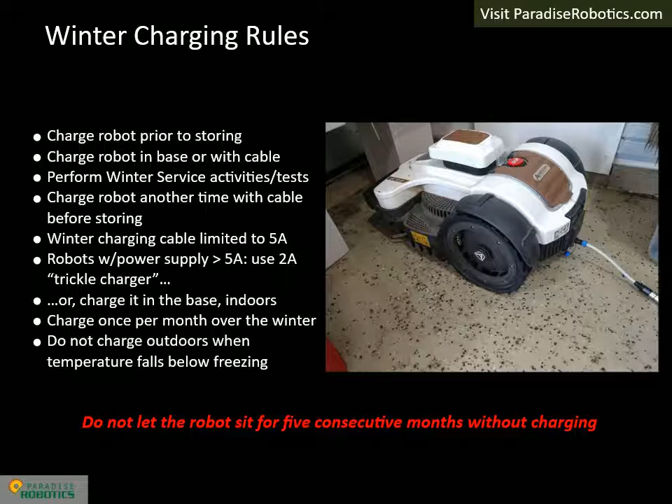Exposed metal contacts always collect invisible oxidation over time. The oxidation must be cleaned each year to prevent charging and rain sensing issues. When the oxidation is allowed to accumulate, a faulty conclusion that the battery has failed can be the result. Always inquire about the age of the battery, because charging issues are typically due to this oxidation problem or something else, such as a bad connection in the base, whenever the battery is less than 8 years old.

Preventing the unnecessary sale of batteries has 2 advantages. First, it increases customer satisfaction and loyalty, which leads to repeat business. Second, it is better for the environment.

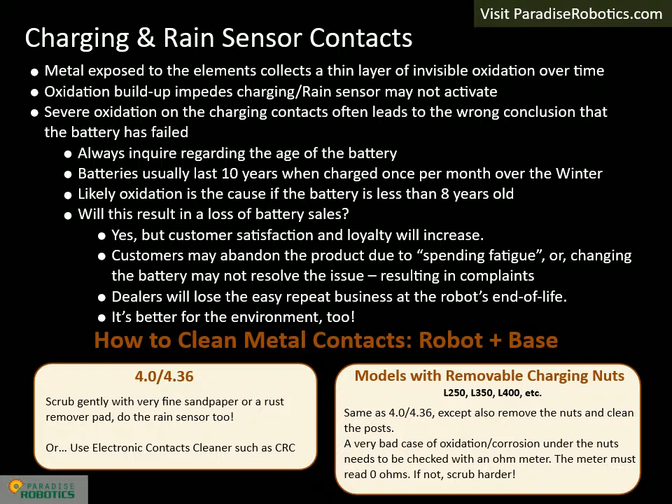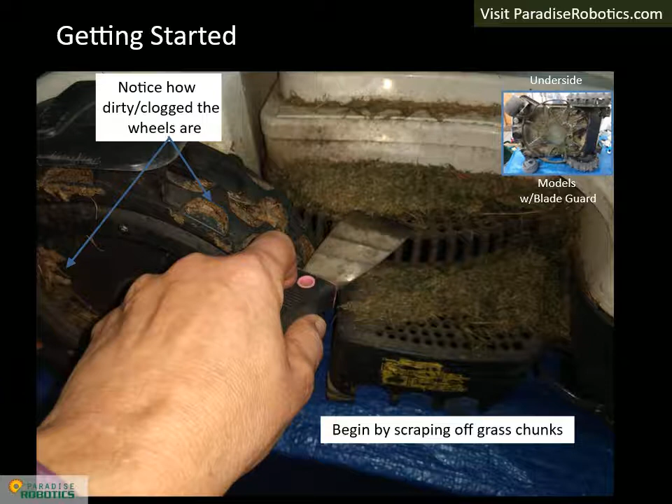It is typical for a robot to have a significant amount of grass that clogs the top or underside, depending on the model. A putty knife is the best tool for scraping and removing much of the grass. A paint stick can be used to reach grass under the blade guard for models that come with one. A small Shop Vac type of vacuum cleaner is an essential tool for performing winter service. By vacuuming as you scrape grass, the overall mess can be reduced significantly.

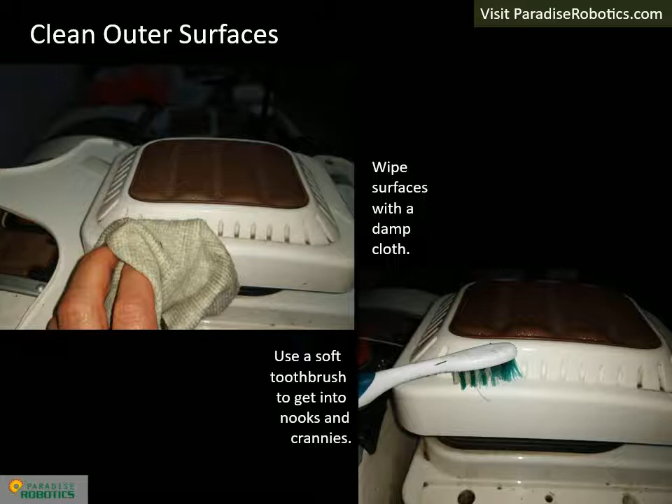Clean outer surfaces with a damp but not dripping cloth. Use a soft toothbrush to get into tight spaces. If you decide to use a cleaning agent, choose something mild such as well-diluted Dawn dish soap.

Use a tool such as a flathead screwdriver to lift the front cover off. It is held on with Velcro. Once the cover is removed, place it in water to soak. Do not soak it overnight as it may cause the labels to come off. Vacuum the top first, then wipe it with a damp cloth.

There are 2 levels of cleaning in winter service: functional and detailing. A functional cleaning can be vacuuming and using a dry brush to brush out the remaining debris. Detailing can be wiping and removing all grass stains. Landscapers that maintain an entire fleet of robots may choose to only do a functional cleaning to save time. Dealers may choose to offer 2 levels of winter service, such as basic and full detailing. Basic winter service would be functional and is at the level the manufacturer requires to maintain the warranty, while full detailing is as close to perfection as the dealer desires.

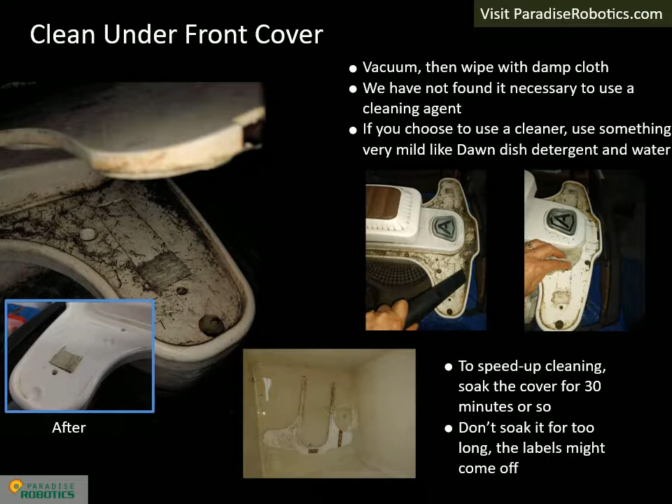The front undercover has about 10 recessed screws. If dirt and debris are allowed to accumulate, it can create difficulties to remove the undercover during a future repair. Remove or loosen debris with a small needle nose plier or flathead screwdriver. Vacuum and then clean stubborn dirt with a wet Q-tip. The goal is to ensure the screw heads are not clogged with dirt and remain functional.

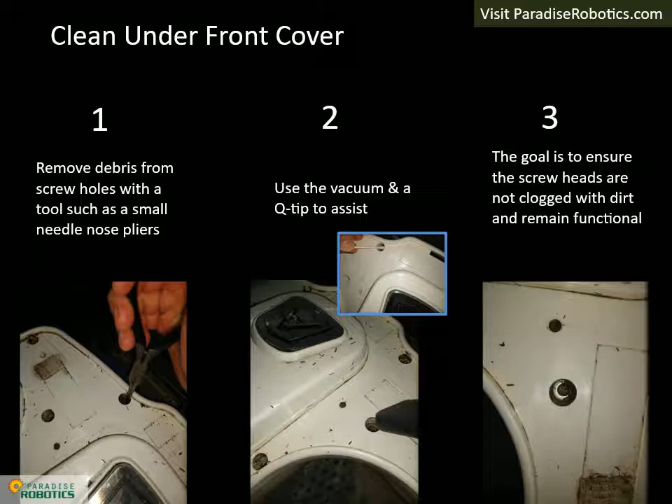Depending on the level of cleaning being performed, that is functional or detailing, the dirt around the edges can be cleaned with a wet toothbrush and then wiped, or it can be left as is. The undercover will be removed in a future step. After reassembly, plan to insert cotton balls in each hole to avoid the screw hole cleaning step during future winter service.

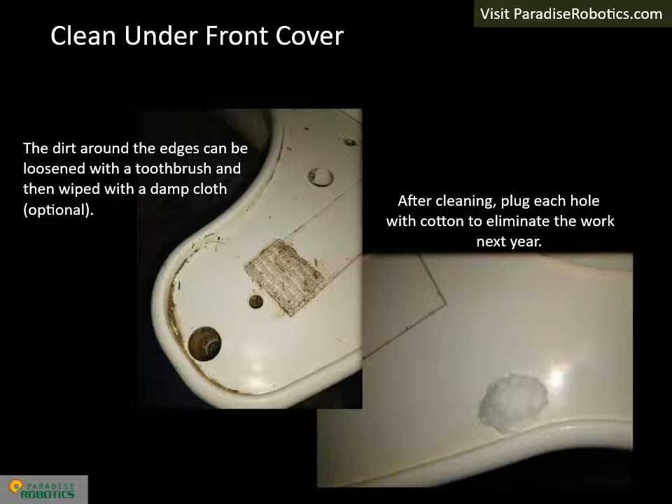Remove and soak the blade in water. We find that a nut driver is easier than using a Phillips head screwdriver to remove the blade.

After soaking, scrape the blade with a putty knife and sharpen it with a Dremel tool that has a sanding bit, or do it another way, using a technique similar to sharpening a kitchen knife.

A functional cleaning of the underside is to scrape off major debris with a putty knife. To fully detail the underside, the robot can be turned upside down and a damp but not dripping cloth can be laid on top of stubborn stains for about 30 minutes. Brush the softened grass with a small nylon scrub brush and wipe it off, repeating as needed until fully cleaned. Never ever use a power washer or hose to clean the underside.

There are electronics up above the wheels and there is a risk of water seeping into the blade motor. Water will cause electrical shorts that will make the electronics fail.

E6000 glue, which is widely available online and at major retailers, is an essential material for repairing unusual problems. Choose the version that dries clear. It is durable, flexible, long-lasting, and highly water-resistant. We have used it for sealing possible water leaks.

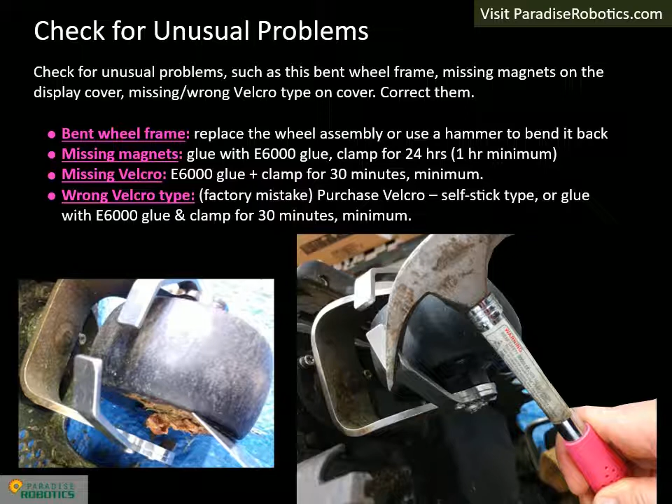Components that turn have a high risk of picking up debris. The debris winds itself around wheel axles and on rare occasions, the blade motor shaft. This debris must be removed. It creates friction that can reduce the runtime or worse, cause a failure if left in place year after year.

A small needle nose pliers is often helpful for grabbing onto debris. After cleaning the debris, ensure the tire turns 360 degrees. Then also verify that the wheel assembly turns cleanly 360 degrees on its vertical axis. Do not apply grease to any front wheel joints.

Certain models have a motorized height adjustment. These models have a rubber bellows that expands and contracts when the height is changed. It is important to clean the grass between each bellows fold. Also inspect the bellows for damage and replace it if necessary.

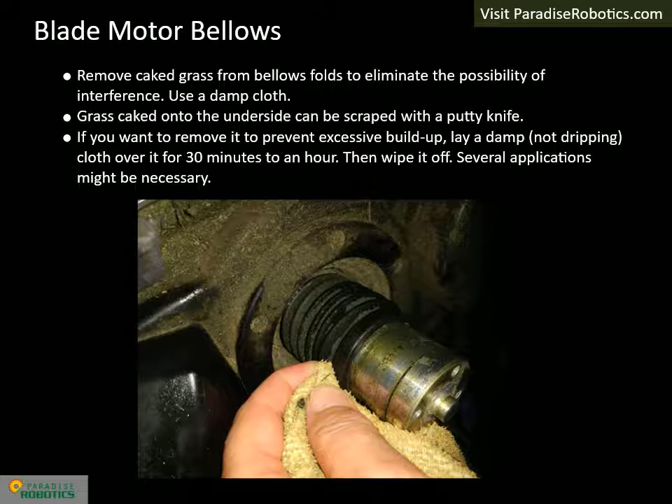Batteries and power modules for models that have the battery installed from the outside of the robot, such as 4.0 and 4.36, need to have their contacts inspected. This step is not necessary for models that have their batteries internally installed.

Use a T20 screwdriver of high quality and in good condition to avoid stripping the screw heads. A stripped head on these components is seriously detrimental to the ability to troubleshoot and repair certain power-related problems. Always provide a firm grip and turn slowly by hand. Never use a power tool due to the risk of stripping screws.

When reassembling these screws, do not apply thread locks since this could create difficulty in removing them in the future. Contact us if you encounter a stripped screw and are unable to remove it. We will provide some tips.

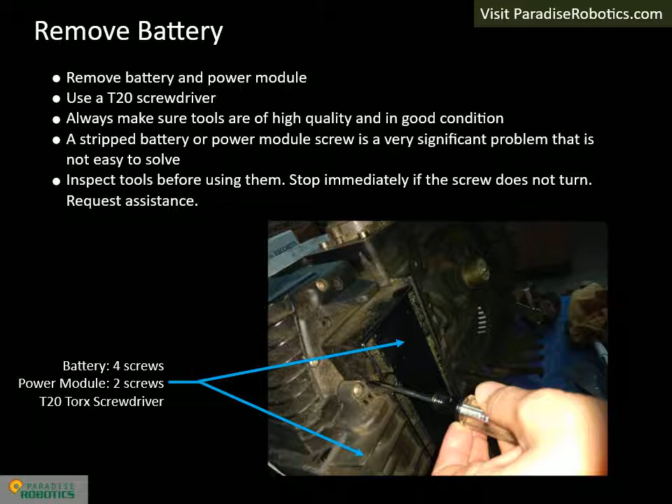Contacts on both sides must be checked. Look at the pins on the robot side and identify pins that have sunk down. If pins are not at the same heights, the connector has failed and it must be replaced.

Then check the contacts on the battery and power module sides. Melted pins on the battery side are an indication that the battery should be replaced. Melted pins on the power module may not require the module to be replaced if the damage is not too severe. This battery connector issue occurs most often in robots manufactured 2019 and before.

There was a factory quality issue that introduced a weak connection. Typically, premium or extra premium models are at higher risk, especially if an installation error is present that causes a false rapid return detection. A false rapid return causes the robot to circle, resulting in a very low battery.

During recharge, the very low battery draws the most current and creates the highest failure risk. All robots manufactured 2019 and earlier must be inspected for these issues. To reduce workload and to eliminate the risk of stripping screw heads, dealers may use their judgment regarding performing this inspection step on robots manufactured 2020 and later.

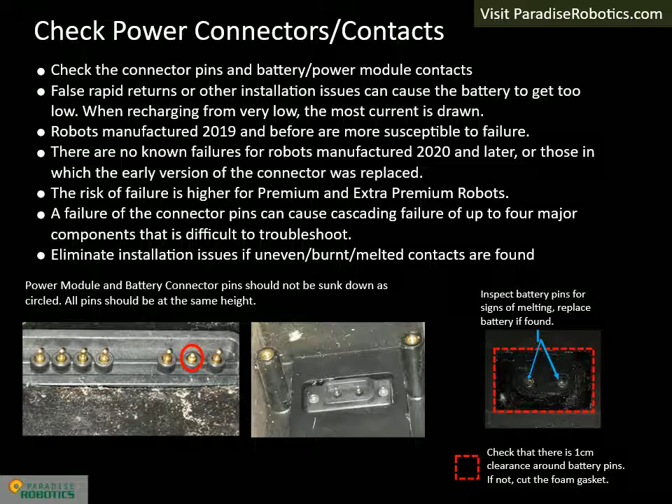Rear wheels with compacted debris must be completely disassembled for cleaning. Use a high-quality metric hex Allen wrench to remove the wheel bolt. It will take significant force to turn it due to the presence of thread lock. Provide even pressure and use the Allen wrench's long side to gain leverage.

If detailing, use the correct size Torx screwdriver to remove the fender if present. For a functional cleaning, it may not be necessary to remove the fender. Simply brush grass and debris off with a stiff nylon brush. Scrape any mud that might be visible after removing the wheel. Remove large debris from wheels and then soak the wheel parts and fender in water to accelerate cleaning.

Clean the old grease off of the hexagon and the wheel with a paper towel. Inspect the wheel motor shaft for wound hair or other debris. Remove it if found. Upon reassembly, a thin layer of Lucas oil red grease with anti-seize will be used to keep the wheel from seizing onto the hexagon, which is a major issue.

Find Lucas oil red grease at auto parts stores. If you can't find it, use an appropriate equivalent. Do not substitute a different grease type. To find an equivalent grease, use the material safety datasheet of Lucas oil red grease to identify the ingredients. The material safety datasheet of Lucas oil red grease is easily found with Google.

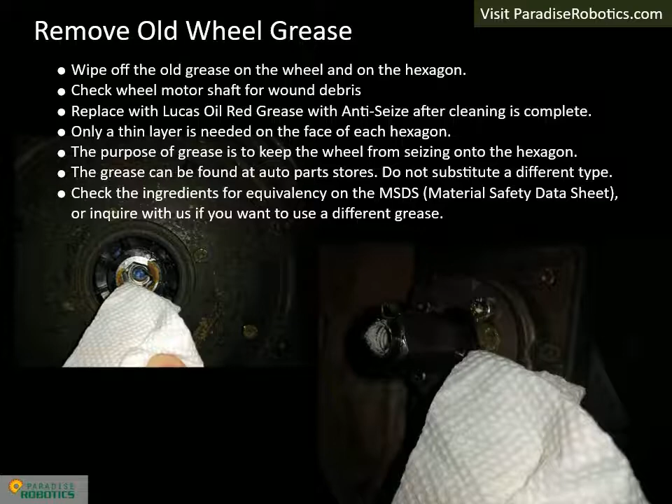A critical step is to verify the integrity of thread lock that is present on wheel motor mounting screws. The test is important because when there is no thread lock on the screws, they can vibrate out. The wheel will go out of balance and will cause catastrophic failures, such as a failure of the wheel motor, a broken chassis, or in worst case scenarios, a failure of the wheel motor driver on the motherboard.

The test is easily performed by attempting to gently turn the screw. If thread lock is worn out or not present, the screw will turn immediately with little or no resistance.

There are two additional important screws to check. One is a tiny screw that goes through the center of the hexagon and the motor shaft, and the other is a set screw on the side of the hexagon. Both of these screws are metric hex screws. There is no need to loosen the screws if thread lock is in good condition.

It is important to use the right type of thread lock. The thread lock recommended by the manufacturer is not easy to obtain in the US. We have substituted green Loctite or Permatex that is available at auto parts stores. It is important to avoid using too much thread lock or a thread lock that is too strong, such as blue. It is also important not to tighten the screws too much. I like to use the phrase girl tight, which means don't flex your muscles.

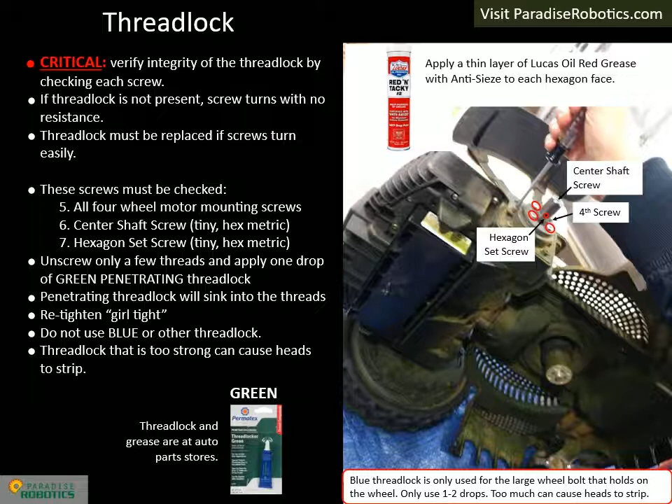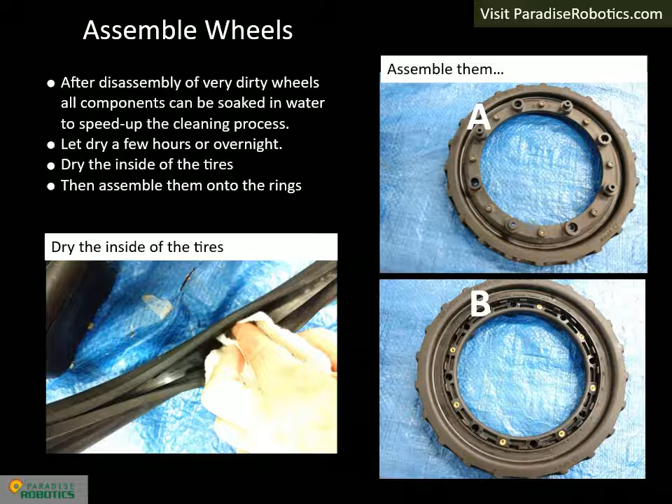Next, apply a thin layer of red grease onto each hexagon face as described previously. Finish cleaning the wheels and dry the inside of the rubber tires if they had been soaked. Then assemble the tires onto the rims. The rims with tires attached are labeled A and B.

Assemble the wheels as shown, following the 6 steps. First install the plate C. Stack C with A. Then stack B with A. Add the outer ring in the final step.

When inserting each screw, turn left first until you hear a click. Then turn the screw right. If you feel resistance, likely the screw has been cross-threaded. Stop immediately and try again. Make all screws girl tight. Repeat on each layer until all screws are installed. Do not use thread lock on the wheel screws.

Later, the wheel will be assembled to the wheel motor shaft. After installing the wheel bolt, remember to snap on the hubcap.

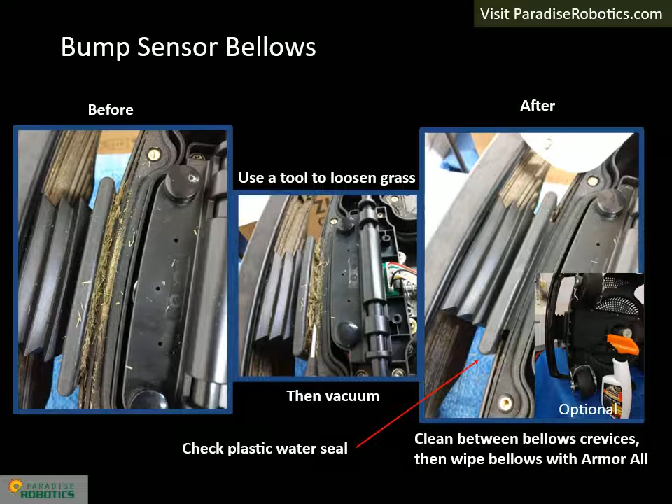Clean the bump sensor bellows at the front of the robot by loosening grass with a tool and vacuuming. Verify the plastic water seal is present and in good condition. Replace it if it is missing or broken. Wipe the bellows with water.

An optional step for longer lifetime of rubber components is to apply Armor All UV protectant. It can be used on clean tires and the outer covers too.

Remove each cover using the appropriate size Torx screwdriver. Remove the grass and dirt that has accumulated around the edges with a slightly damp cloth. Make sure the cloth is not dripping wet since water could get into the exposed electronics.

Look at the display film on the rear cover and ensure it is not coming off. Repair it if necessary. Do not let glue bleed onto the film when repairing. Use enough to seal the water out, but not so much as it oozes into the visible area. Use E6000 glue for the repair.

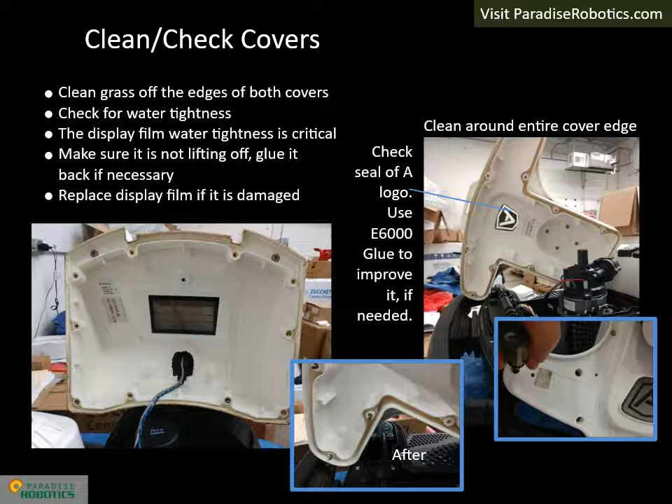Check the seal of the A logo. Robots manufactured 2019 and earlier may need to have their seals refreshed with E6000 glue. Apply a thin continuous layer. If the glue bleeds into the transparent areas of the A logo, it will be visible from the top.

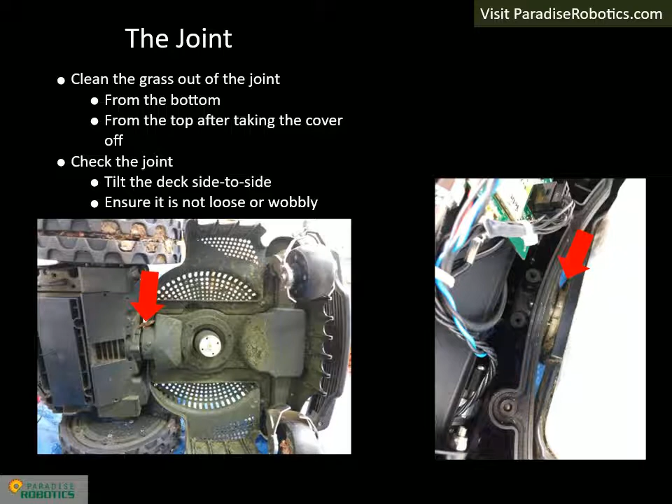It is easy to clean the joint when the top cover is off. Loosen the grass with a tool and vacuum. The bottom side of the joint can be cleaned in a similar manner while cleaning the underside. Then check the joint for mechanical integrity by tilting the deck.

If it feels loose, inspect for the cause of the issue and perform the repair. Clean the seals with a damp cloth. Glue loose seals with E6000 glue. Decaying grass creates humidity, which is bad for electronics. Vacuum both inner cavities and reassemble the covers.

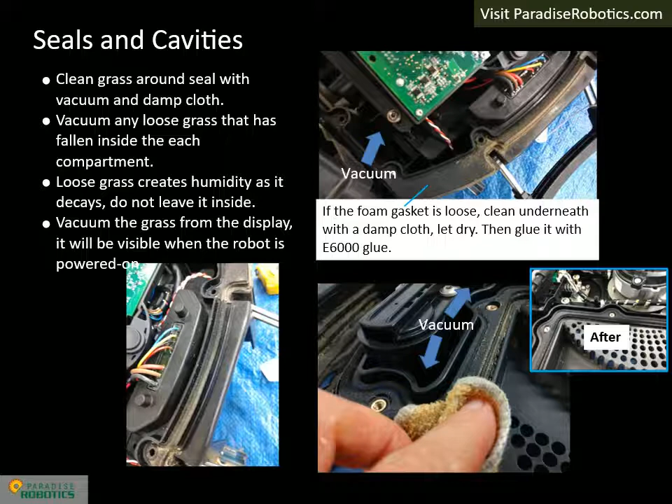Another important test is to look for play in the wheel motor. This can be done before or after cleaning. When doing it after cleaning, perform the test before installing the wheel bolt. Try to move the wheel from side to side. If it moves a significant amount, there may be a problem with the wheel motor shaft parts or the wheel motor itself. Investigate and solve the problem.

Use blue thread lock, only 1 or 2 drops. Apply it a few threads up from the bottom of the bolt. Install the battery. Do not use thread lock on battery screws.

Armor All Protectant can be applied to rubber components to extend their lifetimes. It brings back shine too. This step is not required, but is recommended.

L250i and 350i models have only a few differences compared to next line models. The winter service goals are the same: cleaning, mechanical checks, and electrical checks. The 250i and 350i hubcaps do not come out as easily as the next line models.

Use a scribe, push the tab in towards the A and simultaneously lift. The tabs are located at the 3 points of the A. The bump sensors for 250i and 350i are under the top cover.

The top cover is an integral part of the bumping system. The magnet that is sensed by the electronics is at the end of the metal magnet assembly. Remove the assembly and vacuum the cavity inside. Grass falls in there every season.

Upon reassembly, ensure the post goes through the hole at the center of the 4 springs and make sure the cover's horizontal slots fit correctly over the metal protrusions on the magnet assembly. The internal batteries of these models do not require any checks or maintenance.

The robot should be open to vacuum grass that may have gotten inside and to clean the seals of the upper and lower chassis. Bear in mind that the circuits are live since the battery is installed and connected. Be careful not to drop metal objects inside or let water drip.

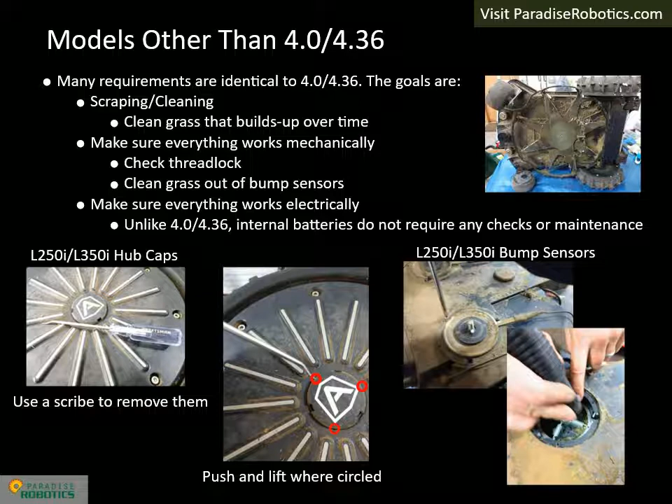The top side of the chassis usually has a lot of accumulated grass. Brush or vacuum it off. If detailing, wipe with a damp cloth.

As shown on the previous slide, remove the metal magnet assemblies. There are 2 magnet assemblies and 2 dummy assemblies on the 250i. The 350i has 3 magnet assemblies.

Vacuum the cavities. When reassembling, look for the horizontal keys on the magnet assemblies. These keys fit through the horizontal slots on the outer cover. If the cover is not reassembled correctly, there will be bump errors.

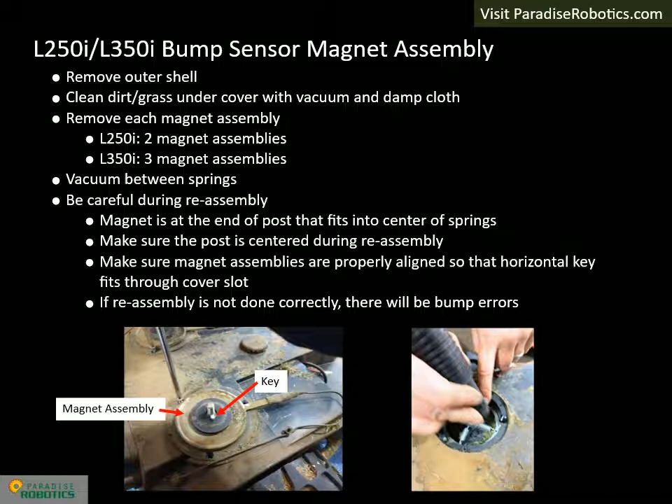After fully assembling the robot, it is time to perform the electronics checks. All robots manufactured 2017 and later use the TXC1 transmitter. That is, dealers can use the transmitter of any robot model for these tests.

Set up a loop that uses around 50 feet of wire. Typically, the tests are performed without having the robot move around in the loop. The wire can be tacked to a wall or may be laid on objects in your facility.

To completely check the robot, it will need to be placed a few feet inside the wire and a few feet outside the wire. Dealers will perform the tests using the service menu. DIY customers will use the normal mode as if the robot is in their yard. If a DIY customer's base is permanently installed outdoors, testing may have to wait until spring in some climates.

Consider using the Ambrogio client for Windows PCs rather than the Ambrogio Service app for generating the robot report. Data downloads between the robot and the computer are much faster. It is easy to generate a PDF of the robot report that may need to be sent to the factory for certain assistance requests.

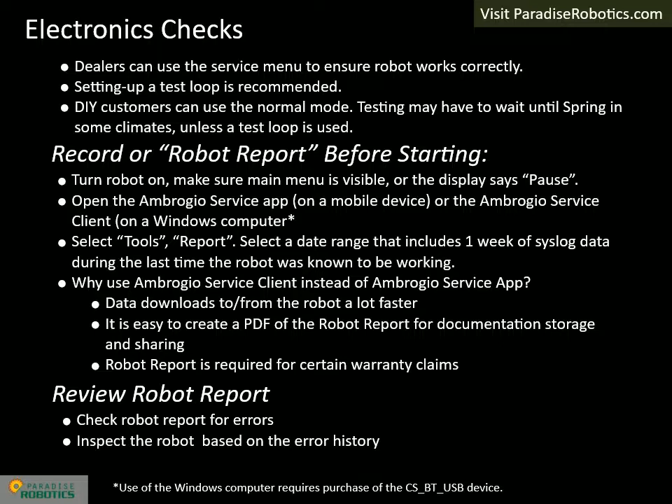Now perform a software update if new software is available. Then generate a second robot report.

After entering the service menu, you will find several options for settings and tests. Only Test Sensors, Test Motors, and Test Connect are needed. Do not use Auto Check because it requires a special setup.

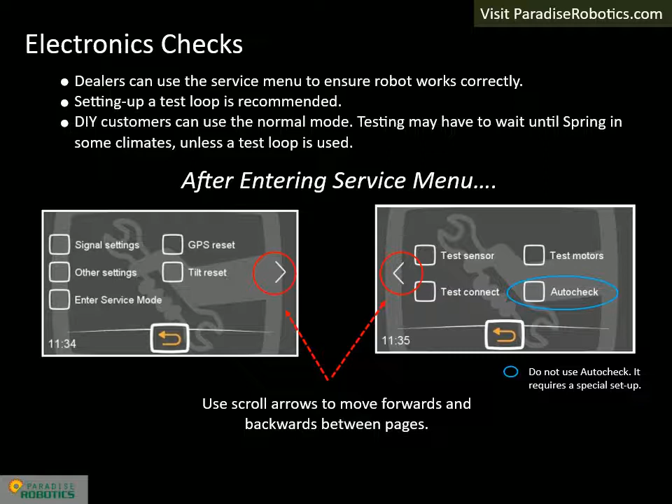Place the robot in the loop near the transmitter and follow instructions A through G on the slide. If the robot is too far from the transmitter, the air marker item will be dim. To confirm the item toggles and is not stuck on, move the robot away from the transmitter a sufficient distance.

If the lift sensor is illuminated while the robot is on the ground, that is, not lifted, it means there's an issue and a repair is required. Move the front wheel up and down. If the associated item does not toggle, something has failed.

DIY customers can run the robot in a test loop or in the yard to perform the tests. Water can be used for the rain sensor, a broomstick can be used to simulate a bump. The robot can be lifted to cause the front wheels to drop. The robot will stop with a lift error.

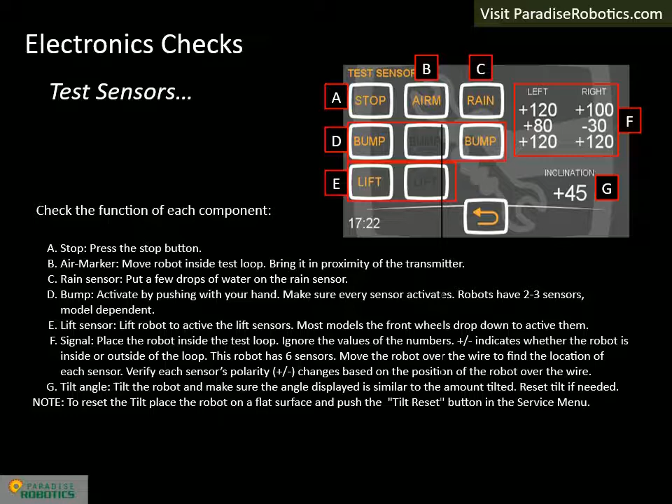It is a bit difficult for DIY customers to do the tilt test without the service menu. I suggest ignoring that one since tilt issues are very rare.

The signal can also be tested in the Signal Settings menu. If there is no signal present in the Test Sensors menu, look at the Signal Settings menu to see if the robot is set to a different channel. Change the channel to confirm the hardware is working, then change it back. Unlike the transmitter that has its channel set with a dip switch, the channels on the robot are determined with software.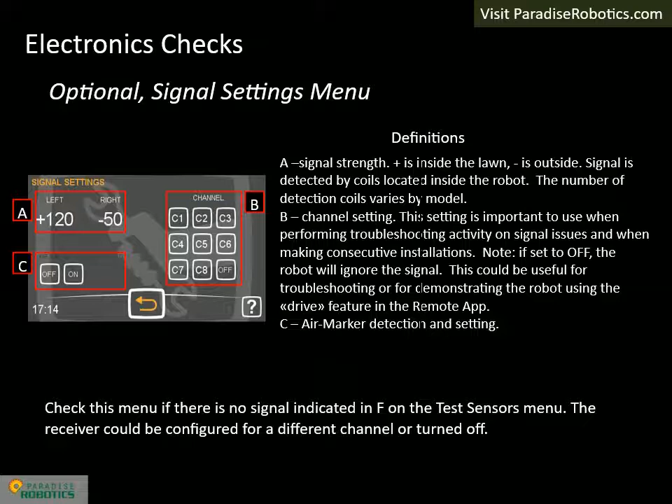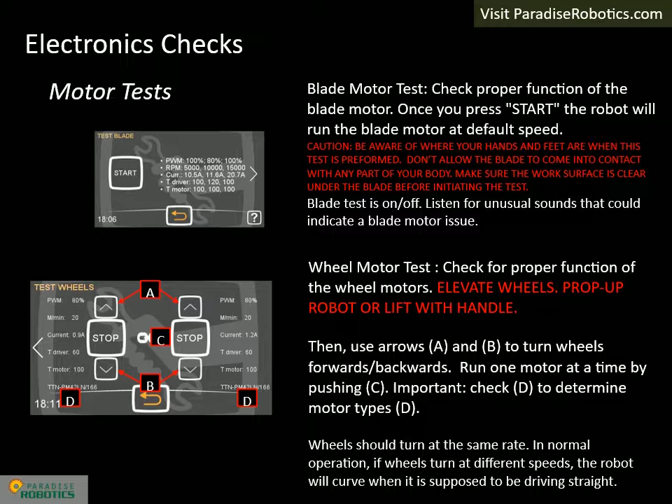Testing GPS requires the robot to be located outdoors. GPS signals are blocked by buildings, so you may find it necessary to move a significant distance away. Wait at least 10 minutes before trying another location. The latitude and longitude coordinates will be displayed when the robot locks on the signal.

DIY customers can simply observe the bars and the GPS icon on the display in the normal mode. This completes the electronics checks. Once each test is performed successfully, the robot will be fully functional when returned to the customer.

Winter service registration is required to keep the warranty active. This is discussed on the next slide.

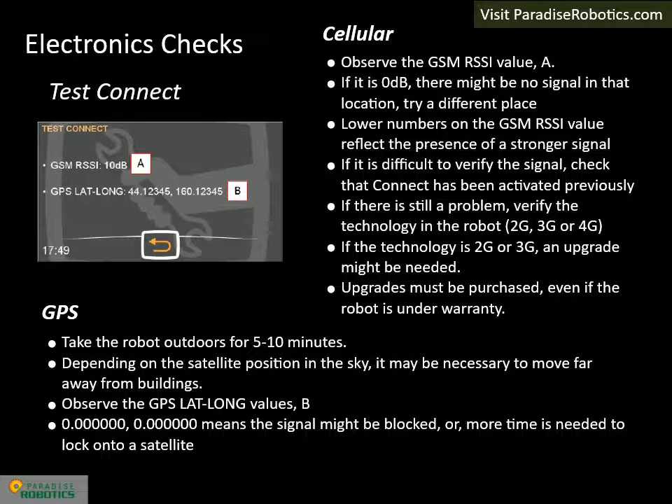The final step is to register winter service in the cloud. This is done by dealers using the Ambrogio Service app or the Ambrogio Service client. Winter service registration is required starting the very first year to keep warranties active.

Dealers in Illinois, Indiana, Michigan, Ohio, and Wisconsin can contact us for assistance with winter service registration. Dealers in other locations should contact the regional distributor in their respective areas. Dealer locations can be found in the Ambrogio Remote app or on the Ambrogio website.

Customers located in the United States who have checked the map and do not find a dealer nearby should contact us for assistance.